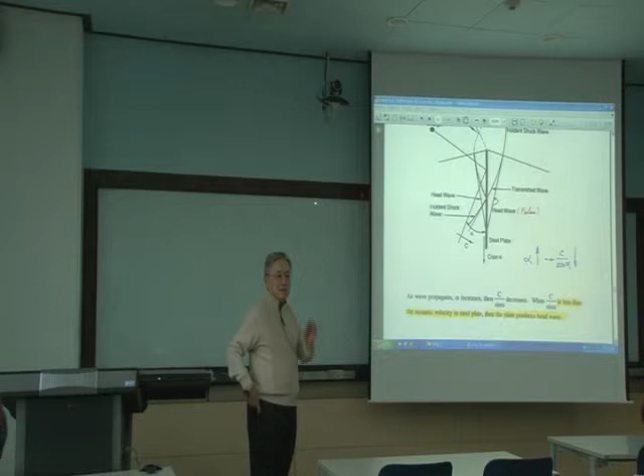Okay, for about 5 or 6 weeks on the underwater explosion topic, the amount of time is not enough, but I expect you capture the essence of underwater explosion. That's what I expect. So even if I cover the first few chapters, the remaining chapter is beyond underwater explosion.

It's combined with the structural dynamics area. So as you capture about 5 to 6 weeks, that amount should be sufficient for the time being, okay? So you have fire a little bit, you have gas explosion a little bit, you have underwater explosion a little bit.

As I look at Abdullah's November project on gas explosion, it's very interesting, a small report he prepared with Hyunchul. Looks very good. In that case, he talks about the combined effect, explosion, gas explosions, and fires, and all that.

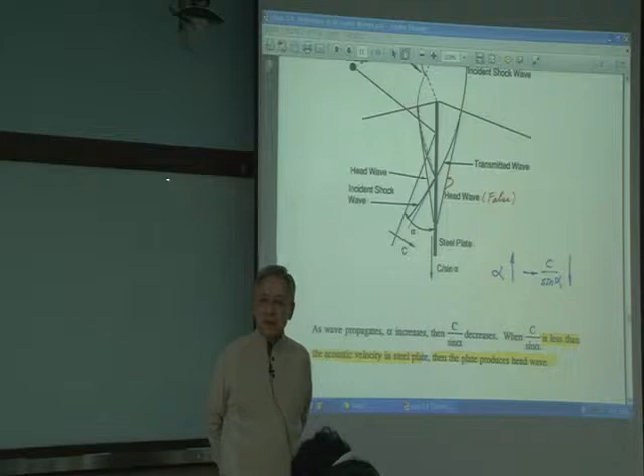This part is remaining of section 2.4. I didn't cover it, but I'll talk a little bit, then I'll move on. So as I mentioned, 3 parts this semester: we cover fire, gas explosion, underwater explosion. All the characteristics are quite different, but I'm pretty sure you gain some insight into the phenomena, but they are not really, if you look carefully, independent of each other.

It's all connected. It's really in the art of explosion. Fire is always there, so gas explosion can be connected very easily, and underwater explosion can be connected with fires and so on, okay?

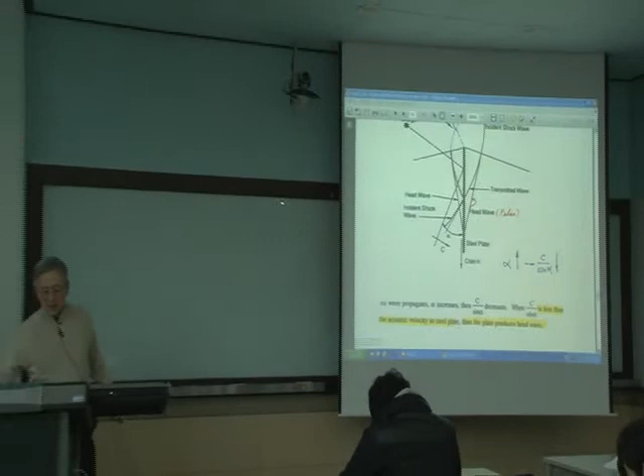This wave is really interesting, and it shows the general. This was one of the Navy reports, but it's not a classified report, so it's showing the general wave action. This is a foam, okay, like a styrofoam. And this is a steel plate, and this is styrofoam. This is a really interesting type of material that the wave cannot transmit through, okay?

It's something like air also. And of course, think of this media as water, and this is a foam. So which means in the water, there are air pockets in there. Whenever you have an air pocket, the shock wave does not able to penetrate through the foams, okay?

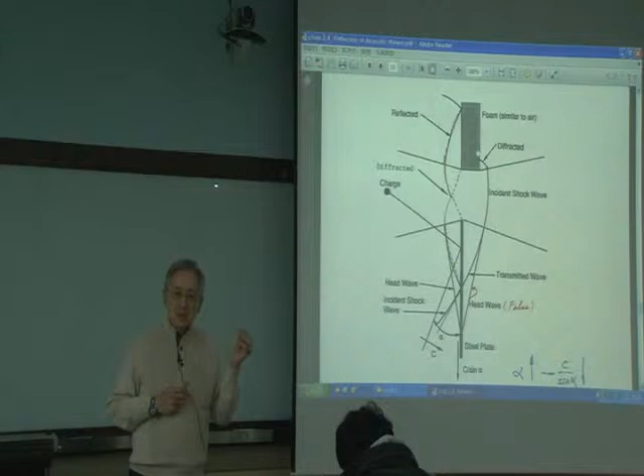Because we learned this week the water and air interface problem, shock wave in the water does not transmit into the air. Very little. As we saw in the example problem, only a fraction, 1 megapascal out of 1,000 megapascal, passes through. But we don't even recognize it, we don't feel it.

So here this is a foam, but as steel is concerned, it transmits the wave right through. It's almost transparent, okay? So the charge explodes right here, and this is the opening, okay? And this is just drawn in 2D. You can think of it as 3D also.

So at the time of explosion, of course, a shock wave will propagate. So this portion is the wave passing through the hole here. So this portion is the incident shock wave. Then it's going to propagate through.

But this is a continuation of this incident shock wave, closing in the backside of the foam. This wave doesn't go through here. It does not go through the foam. And this is called the diffraction wave.

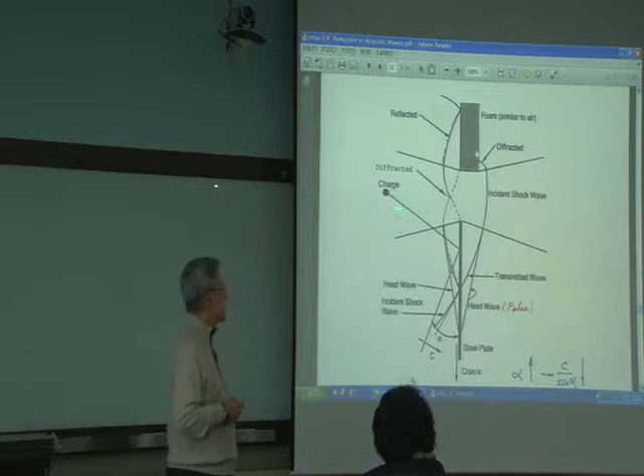What the diffraction wave is - if you turn on a flashlight in darkness, for example, you see the light go through. Behind the obstacle, in this case a foam, if you stand here, you still see the light there. You can see things because of the diffraction effect. Diffraction wraps around. Okay, that's a part of the wave.

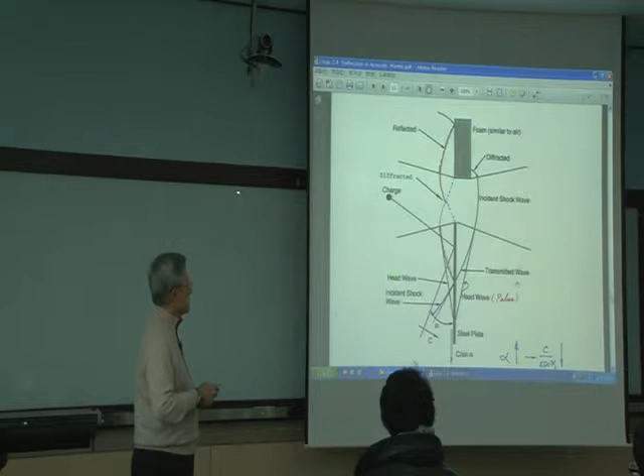And of course here the wave reflects, as at the time of explosion, the spherical wave will generate and propagate. It hits, then it will reflect, because this acts as air, and this is the reflection wave.

And the reflection wave here, see, it wraps around the corner here. So this part is called the diffraction, same as here, okay? And on the other side, at the corner, it diffracted right from here, going through, it closes. Wave never jumps. It's always close to each other.

And this side looks a little bit complicated, but the reason I put this in is to show you the so-called head wave. Whenever you hear of the head wave, there is no energy in the head wave.

Very little energy, almost no energy when you hear the head wave in the water. Look at this closely. As the spherical wave hits the steel, it penetrates through. This portion is the transmitted wave, with continuity preserved here. And as the shock wave moves forward, the reflection wave from the steel plate occurs.

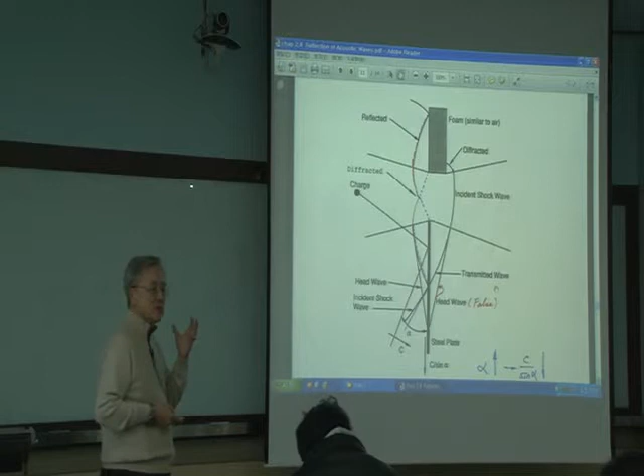Then the end of the wave is suddenly moving faster. It zaps and goes through faster. So it gives an effect to pull the wave here, this reflection wave and transmitting wave right at this corner, and it moves fast along the plate. So it generates suddenly another wave in front of the reflection wave and transmitting wave, moving this way and that way.

Not much energy, almost no energy in there, this head wave. This effect is something like when submariners are inside of the submarine and an explosion occurs someplace. They can hear the explosion, then suddenly they feel the wave hit by the head wave. But in fact, that was not really the energized wave, it's just a false wave. Sometimes this is called the false wave, not the realistic wave. Then they feel, oh, something has happened, so they feel it's gone.

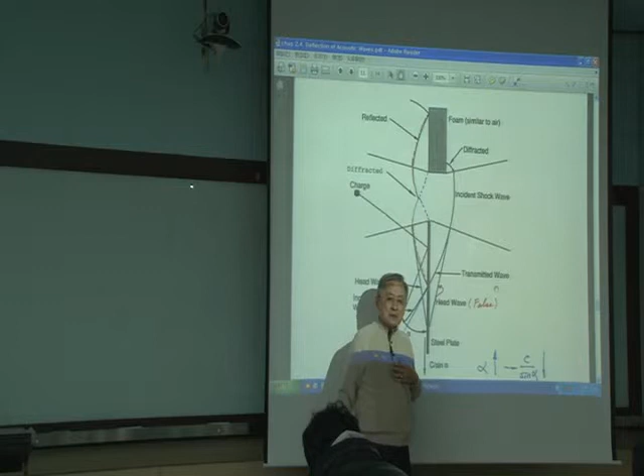In the very next moment, the rear shock comes and hits. But physically the head wave does not affect the target. So this is the reason I put this on. And this case is similar, but this is a plate all the way, showing how the head wave is generated at the end.

This is the case similar for the effect on, affected by head wave, water, and this is the charge, and this is the incident shock wave by the charge, and the image charge - I could put it here - this is the image charge, reflection by the charge, which means you can put the image charge and draw the shock wave front. This is a wave front by the image charge, so it's a reflection wave.

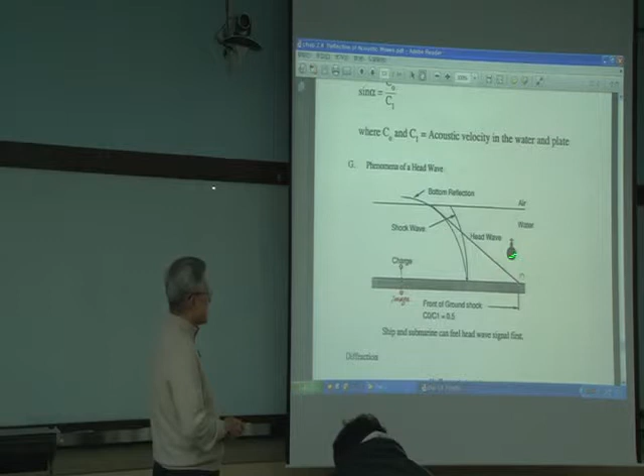Then I can draw this point pulled along here because the acoustic wave in the ground is much faster than C naught over C1. C1 is the acoustic speed here in the seabed, and C naught is the acoustic speed of the water, and this point gets the effect to pull. This point will move, but it looks like there is another wave in front of this bottom reflection wave. Another wave will generate and propagate, and this so-called head wave will hit the target, but they feel, oh, something came in, then the rear shock comes afterward. So it's called the head wave or false wave.

But in any other book, they don't talk about the head wave. I think only for naval applications do they talk about the head wave here. And the diffraction wave creates a shadow zone behind the obstacle.

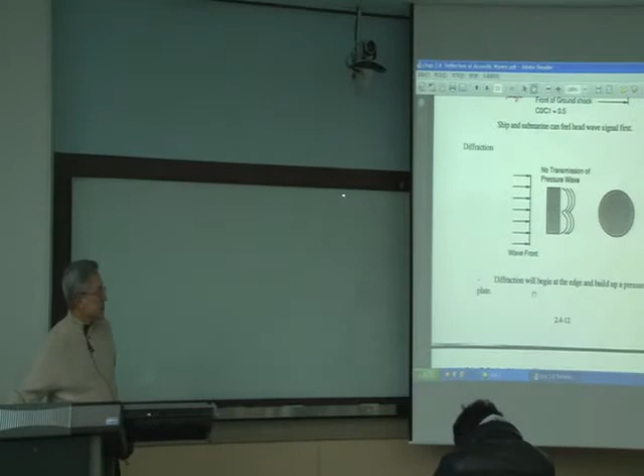Read it through, this is the last equation in chapter 2. The wave propagation velocity in the water - this is acoustic speed in the water - is a function of salinity.

Salinity is the salt content, measured in parts per thousand. The range of salinity S is about 34 to 37, so the value is almost fixed. If you go to the Indian Ocean, Atlantic Ocean, or Pacific Ocean, this value changes a little bit, but you can say 35 or 36, that's really fine.

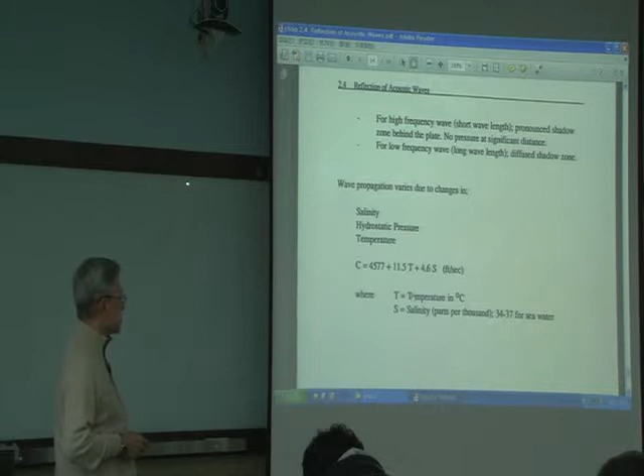Acoustic speed in the water is also a function of hydrostatic pressure. As you go deeper and deeper, acoustic speed changes, and temperature is another parameter. But hydrostatic pressure is a secondary parameter, not the major player, so you can neglect that.

Then C equals 4577 plus 11.5 T plus 4.6 S. This is unit dependent - C is in feet per second, temperature is in Celsius scale, and S is just a unit number between 34 and 37.

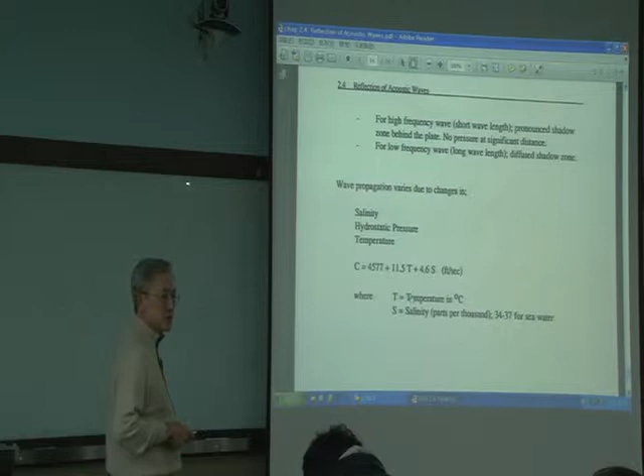So if you have to consider more accurate acoustic speed in the water, this is the equation you can use. This is not for acoustic wave propagation study - the focal point for this equation is really for explosion relevant cases. When you talk about underwater explosion with a surface ship or submarine, this is a perfect equation.

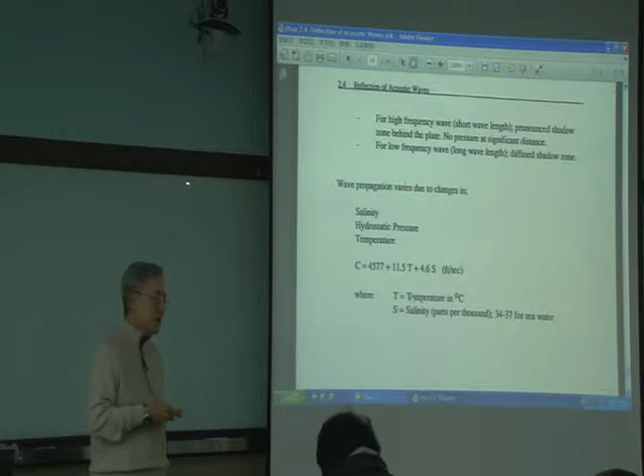But if you talk about acoustic velocity, caustic effect and all that, then you have to consider the effect of hydrostatic pressure, because it depends on depth - like 20,000 feet, that's deep water. That situation affects the acoustic speed, so you have to account for it. But in underwater explosion research, this equation is a very good equation - you can use it without any reservations.

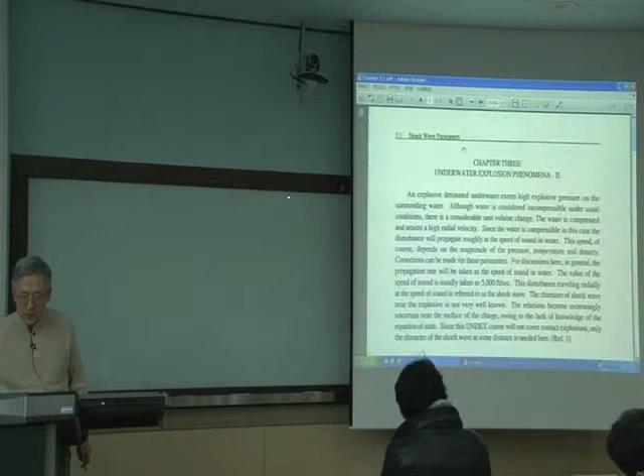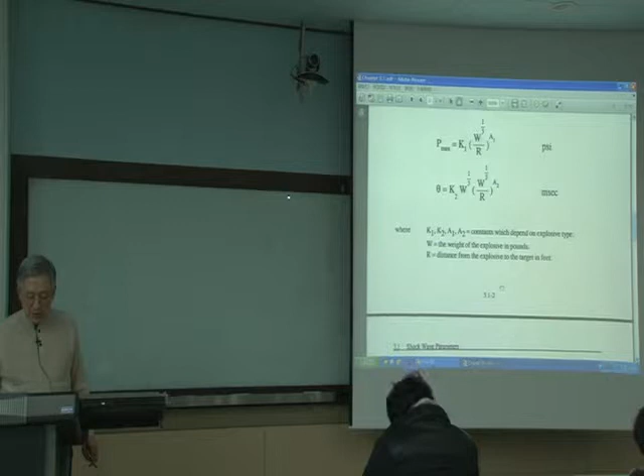This note is not the original - you modify it, because as I showed yesterday, a red line happened to be there. Anyway, P max and theta - what do you call theta? Decay constant, right? Which really defines the decay rate of the exponential decay pressure profile. And this is what we did yesterday.

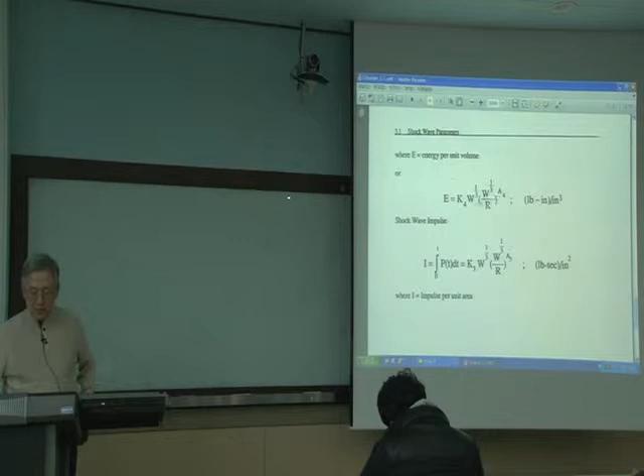This is a collection of all the empirical equations. Also here, this is energy per unit volume, this is impulse - shock wave impulse. And A4, K4, A3, K3 were in the table as I showed yesterday.

And section 3.2 I started yesterday - gas bubble behavior and gas bubble pulse loading.

Here, what's A max? Bongshik, what's A max? Yongyan, what's A max? Louder. Maximum bubble radius - the first gas bubble, that's the largest, right? A max. What's the 33?

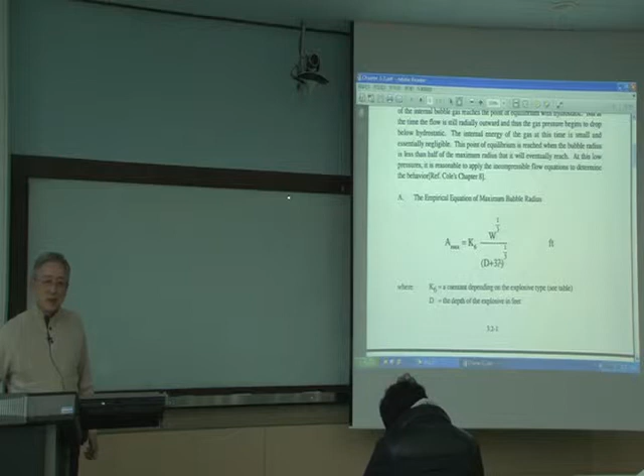Abdullah, what's the 33? How do you derive the 33? Kyungsuk, where does the 33 come from?

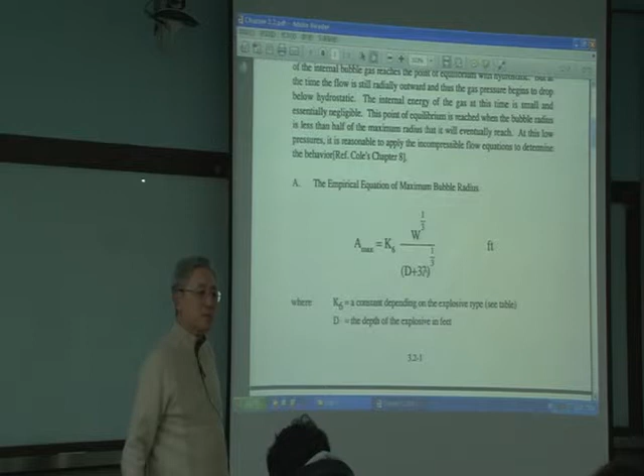Atmospheric pressure, equivalent hydrostatic depth for atmospheric pressure, 14.7 psi or 1 bar. We did this, right? Remember? And what's the T here?

Jude, what's the T here? This is the first period of the gas bubble.

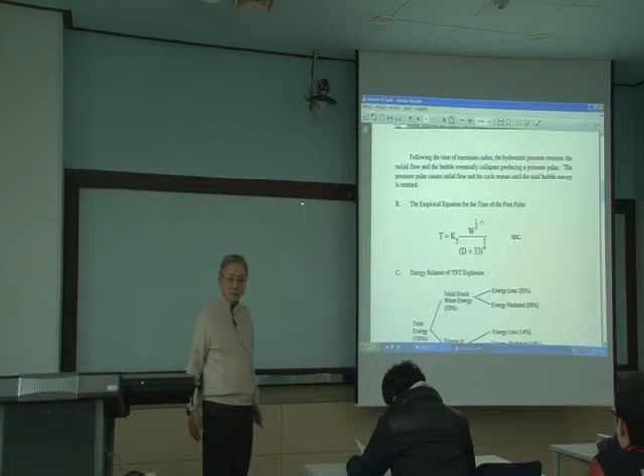Sometimes you have to compute the gas bubble radius. And I mentioned to you on Monday, total energy - about 53% of the energy is taken by the shock wave. The remaining 47% comes with the gas bubble. Gas bubble is much slower.

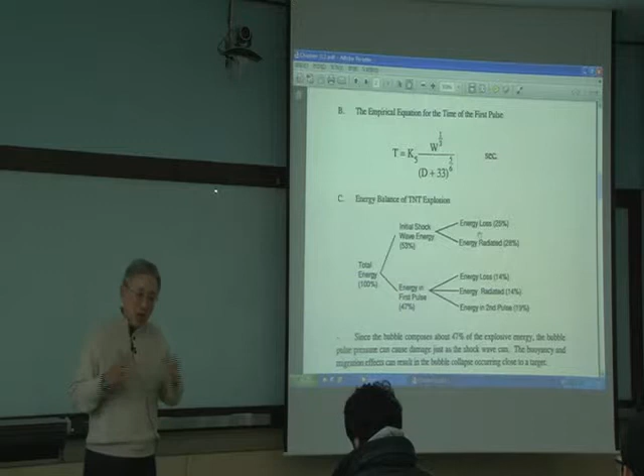Shock wave hits and goes away, but gas bubble oscillation is slow. That really gives damage to the target, damage to the ship, damage to the submarine. And 47% - shock doesn't carry everything, only about 53%. This is really experimental observation.

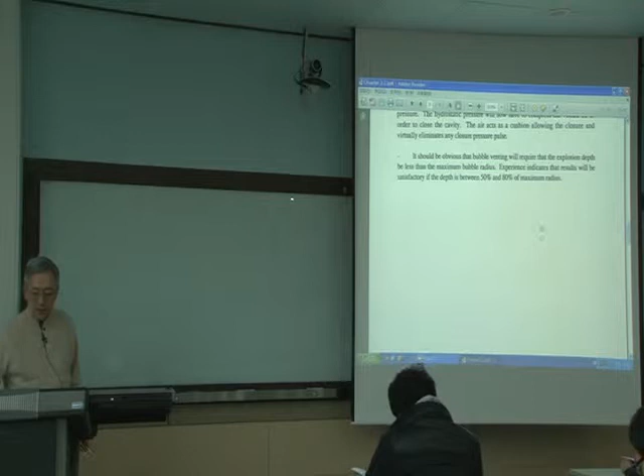And this varies, so I mentioned you don't have to worry too much about this, but it is important: 53% roughly sweeps away with the shock wave, the other 47% comes with the gas bubble. All this phrase is a reminder, and when you have time, I really want you to read that.

Today, bulk cavitation is what I want to talk about - next about 20 minutes, bulk cavitation. When you hear about bulk cavitation, cavitation at the time of explosion always occurs near the surface, near the free surface.

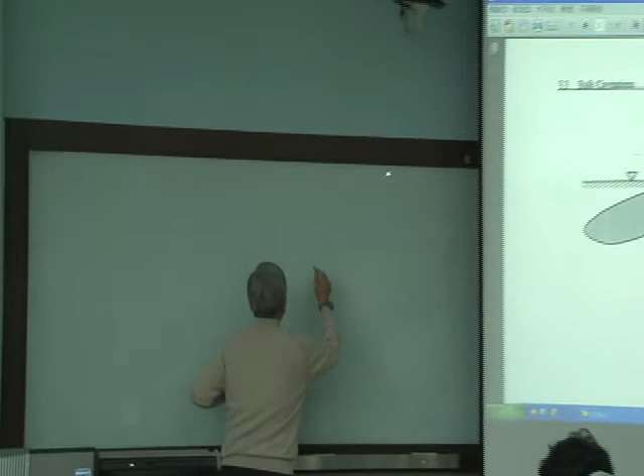This is a free surface. So I'm going to put the vertical line here. So I say this charge is sitting right here. And as you see, the shock wave really propagates in all directions, in radial direction. When the shock wave hits, then this bulk cavitation zone occurs near the free surface, like an umbrella shape.

This is the upper cavitation boundary. Upper - this is the upper cavitation boundary.

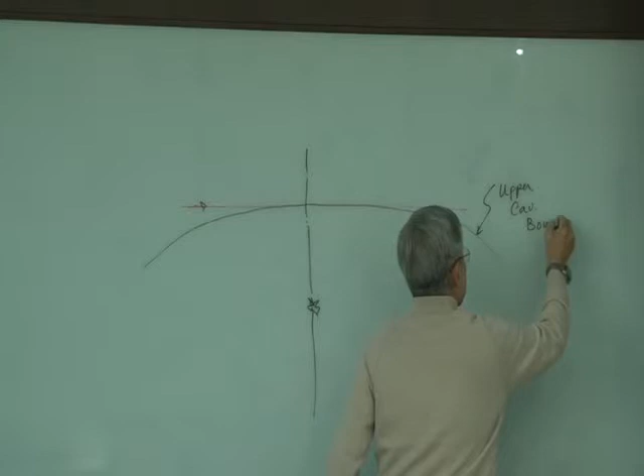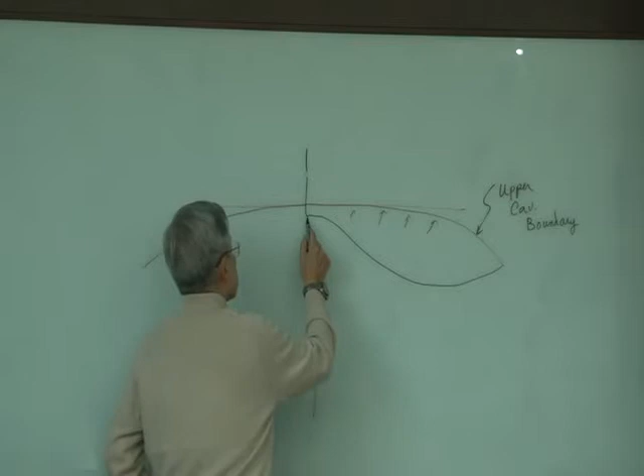This is due mostly to the incident shock wave initially, but afterward, due to the rarefaction wave or tension wave, a lower cavitation boundary occurs, something like this. It's not very good, but it's of course axially symmetric, it's 3D, you can rotate this. It's like a big umbrella kind, not that really fat. The calculational result also shows in the next few pages.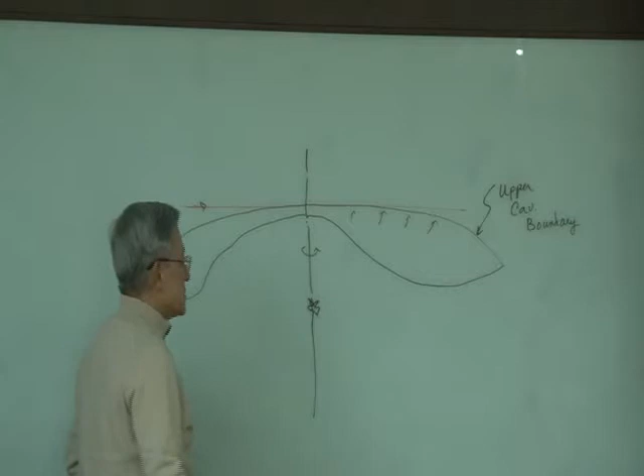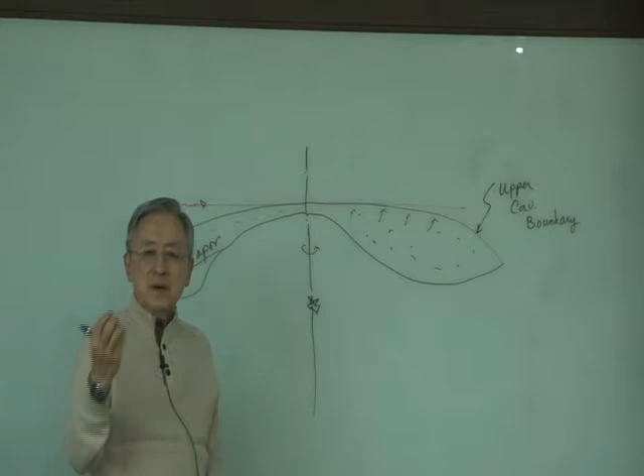When you hear about cavitation, you can think of a bubble, like propeller cavitation with lots of little bubbles. But here, this is not propeller cavitation, this is really cavitation due to explosion in the water. All of this is like a vapor, a pocket with very misty water bubbles. There's no pressure inside here; pressure is equal to zero inside this bulk cavitation.

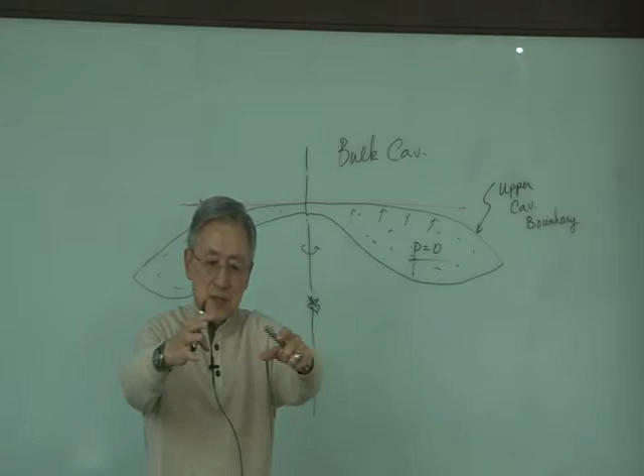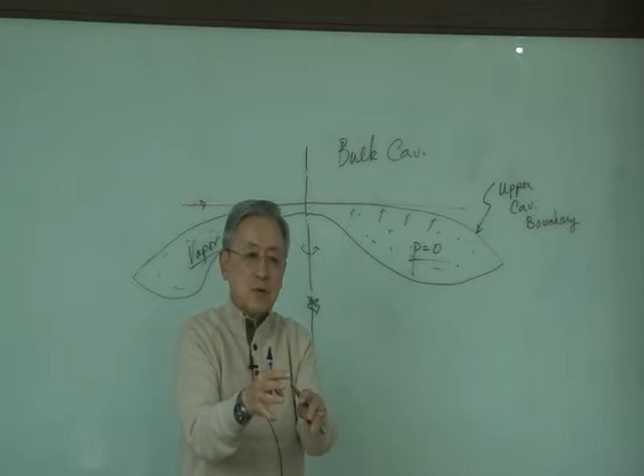At the time of explosion, if you have a chance to look down at the underwater explosion process, you can see the surface of the water suddenly turns white, and the white zone spreads fast. Then a plume occurs, but it doesn't stay long since it spreads quickly then closes. The cavitation zone closes because water is surrounding the cavitation air pocket, so it closes very quickly. It's a huge, umbrella-shaped cavitation zone, then it closes.

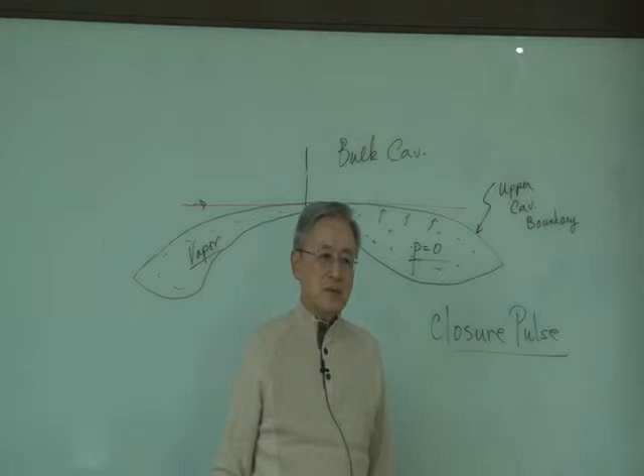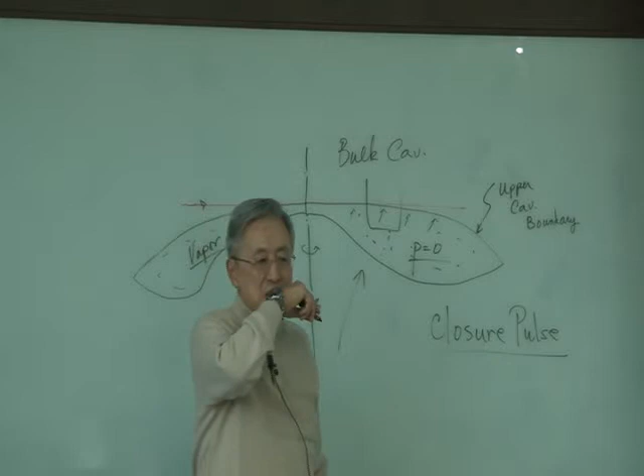In the water, in the explosion process, whenever it closes, it has a so-called closure pulse. It's a secondary shock wave effect. Bang, and it closes. So when a surface ship is sitting here and another shock wave comes, that shock wave cannot penetrate through this bulk cavitation zone, in the instant sense. So it doesn't affect the ship sitting on the bulk cavitation, but the phenomenon is so quick, not in terms of milliseconds, but you can explain it in terms of a fraction of a second. This is called bulk cavitation.

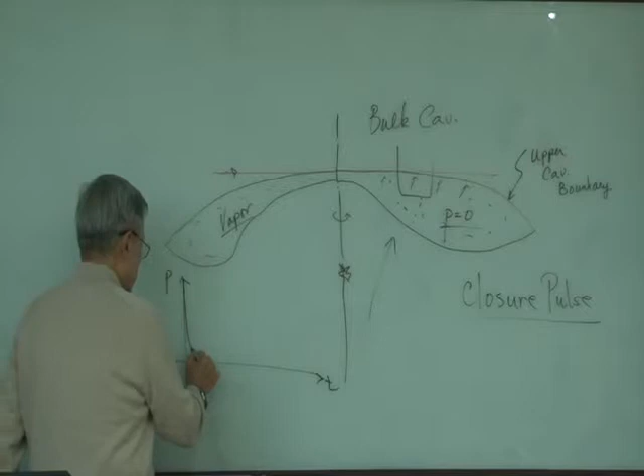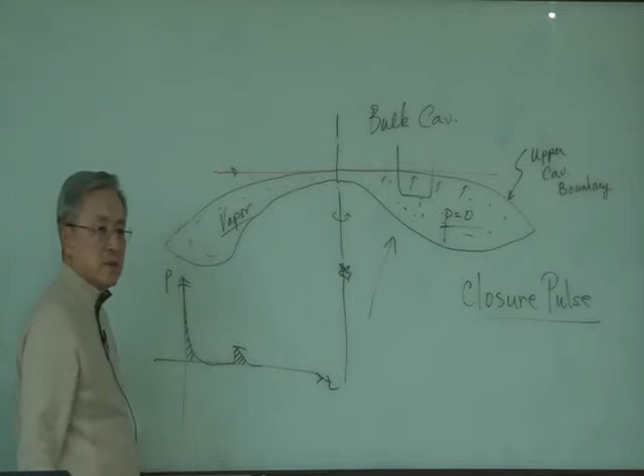But this secondary pulse is not that big. The incident shock wave goes straight up like this, and when this bulk cavitation closes, it could generate another peak. Pulse means another peak, but this pressure height is not big compared with the incident wave. But if you look at the area under the curve, you may not be able to neglect it, because the area under is called impulse. This impulse is related with damage, because it could give heavy damage to the target, so you have to think about that.

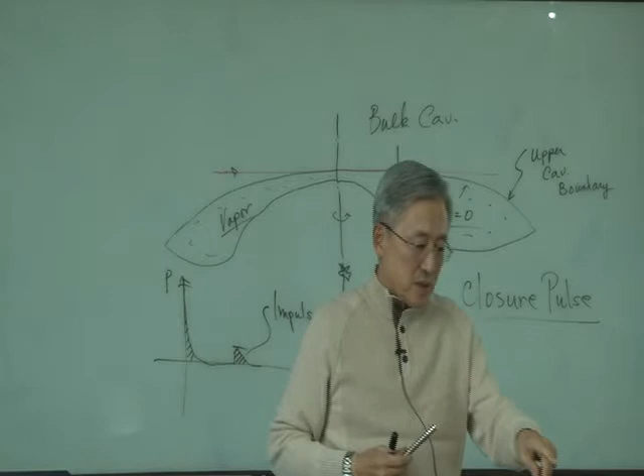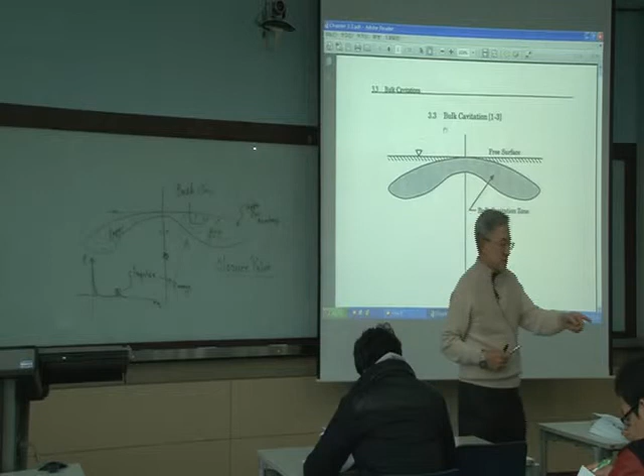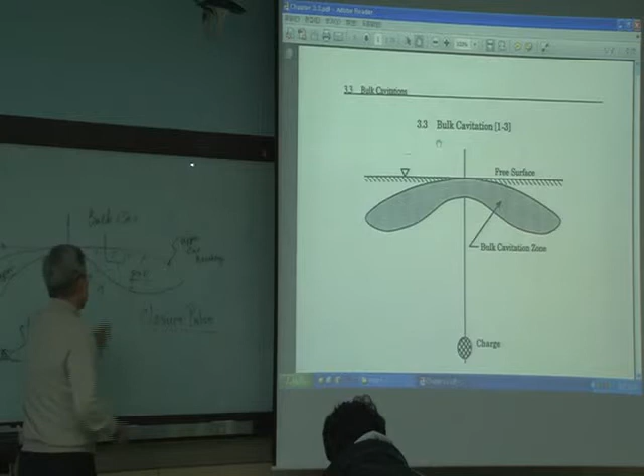So my lecture note has two different sections. Remember bulk cavitation, this is the section I'm calling section 1, to explain bulk cavitation. There's another section behind or in front of it to really derive the equation for upper cavitation boundary and lower cavitation boundary, front or behind of the section. This section is 3.3, we'll look around there. What's the section here? This is the section. So the whole derivation of the bulk cavitation equation is right after 3.3. Then you can really look at it, as you have time or want to know more detail, the derivation of upper cavitation and lower cavitation boundary.

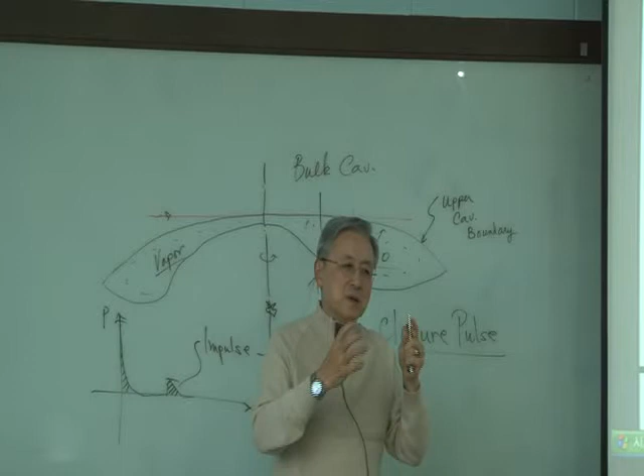When I say this vaporized water particle is really trapped in this bulk cavitation zone, I mean vapor, water vapor. The water vapor can resist tension up to around 0.3 psi, which is very small. So rather than dealing with that 0.3 psi, you can look at it this way.

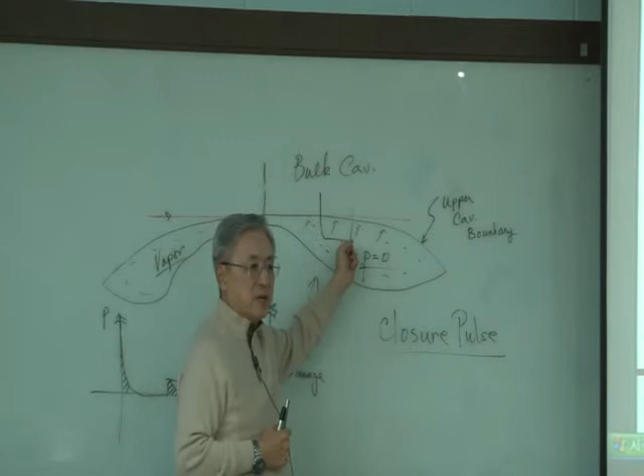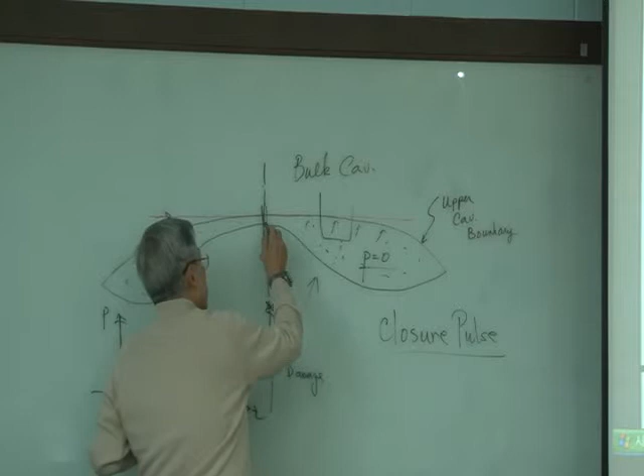You pick up any point. If at that point you can compute the total pressure, and the total pressure you computed is zero or below zero, then you can declare this is a cavitation zone, because water cannot sustain tension. Well, it could go a few psi below zero, but you don't have to worry about that. If the total pressure goes below zero, then you declare that cavitation occurs. Then you can draw the upper cavitation boundary and lower cavitation boundary. So you end up just computing that part, then it's axisymmetric, so you don't have to compute this other part.

When you rotate it, it's going to show the cavitation. So this I want you to read, I just put a few words in there. And the logic behind it is what this graph shows.

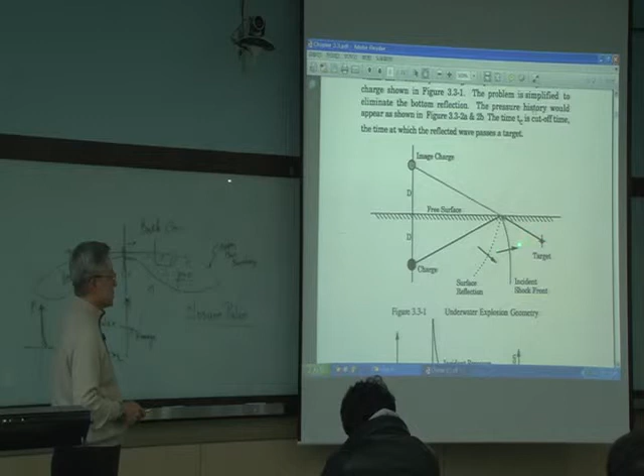This is the real charge, and this is the image charge. I draw the line here, then you can determine this intersection point. The incident shock wave is this line here, and this dotted line is the surface reflection wave. In other words, you put the image charge here, then draw the radius from here to here, and draw the line. So this is the surface reflection wave front. This will propagate, this will propagate, that's the basic wave action.

And of course, this is a compression wave, and this is a tensile wave. Think of the image charge as the attracting source, attracting the water particle here. Then the wave front is moving downward, and all the water particles, due to the image charge, are shooting toward the center here.

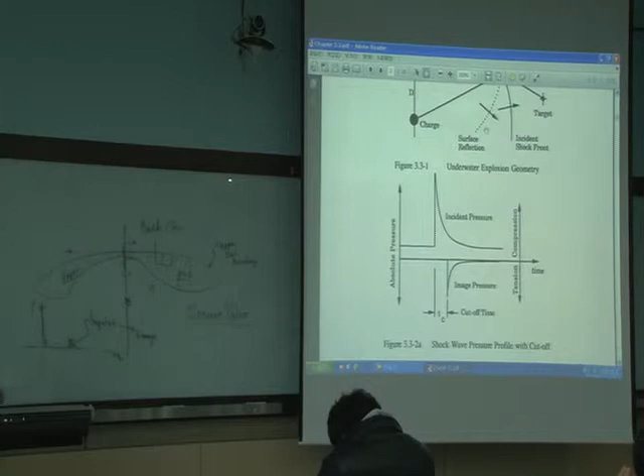Drawing into the XY plot, this is the whole story to explain the bulk cavitation. Inside the bulk cavitation, total pressure is equal to zero or below zero. Water cannot sustain the tension, so below zero means it's zero. Here, the vertical axis is absolute pressure.

Hyuncho, look at here. I can't afford to lose anybody here. This is absolute pressure. And this part is what pressure?

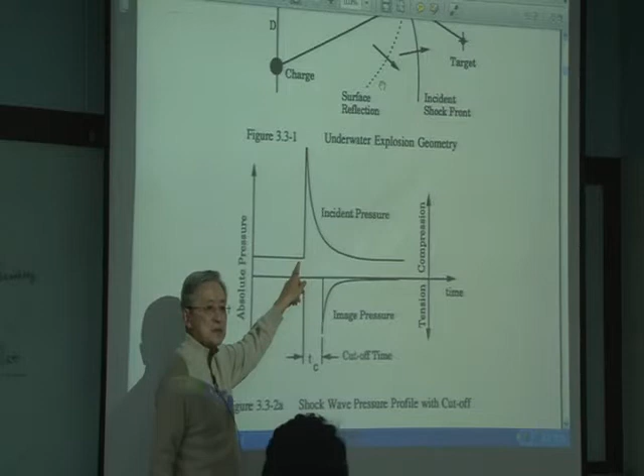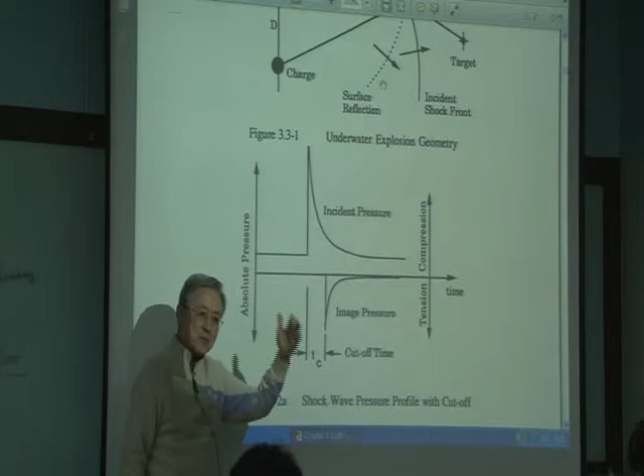You could have a target someplace below zero here. Then this part is hydrostatic pressure plus atmospheric pressure, right? So this part always there is static pressure. When you look at the target point, which is below the free surface, it's hydrostatic pressure up to that depth plus atmospheric pressure, always there, 1 bar, 14.7 psi. So it's there, right?

Then bang, then explosion occurs here. It's right up there, then it's shooting up. So from here to here is what? Dynamic pressure, right? Due to the shock wave. Due to the shock wave, it's a bang, and after that is an exponential decay curve, right?

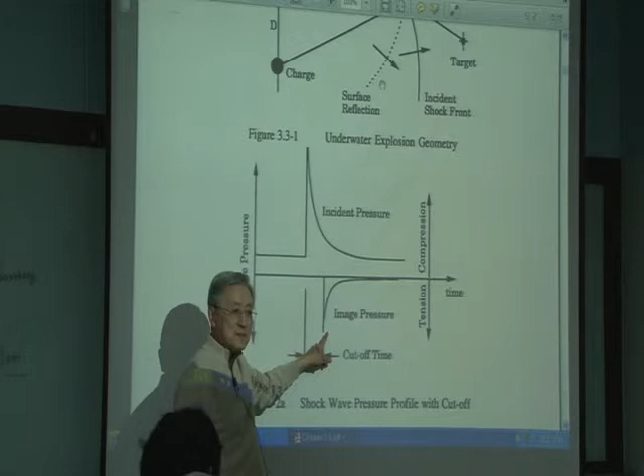Make sense? Then suddenly there is a negative pressure peak coming down and slowly merging into zero. What's this? Juil, what's this? Kolgi, what's this? Tell me.

That part is the surface reflection wave, or tension wave. Surface reflection wave, look at this. It's the first wave reflected from the surface to hit the target. So as you look at it, this is the reflection wave path, straight up and coming down here, right?

So this is pressure. I put the gauge right here. This is the pressure profile. And the incident shock wave, by this straight line, hit the target first, right?

Before the target is hit, it's static pressure. When the shock wave hits the target, shock pressure is added right there. Then the shock wave passes through exponential decay and converges to just the nominal pressure, right?

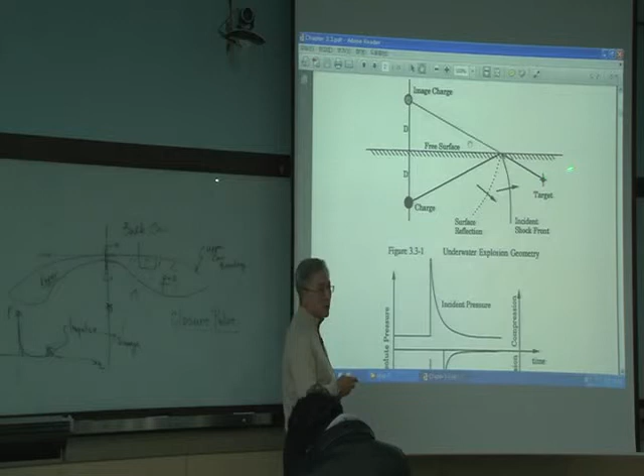But the surface reflection wave comes up along here. Then, due to the reflection, it takes this path and hits the target, compressive wave here. Then from here to here is called the tension wave, or as I talked about before, tension wave or rarefaction wave.

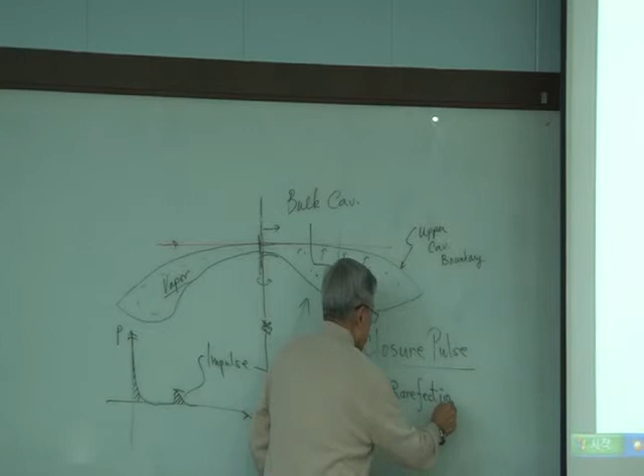Or the surface reflection wave, it's all the same. Up to here is a compression wave. From here to here is a tension wave. Tension wave is the wave which pulls the water particle. Water cannot sustain the tension, which means it comes right down to zero.

So look at this, water from here to here, water particles try to fly along this line toward the image charge, and the water particles keep trying to shoot as the wave comes down here. Toward the image charge, the water particle is moving in the image charge direction, but the tension wave front is moving toward the target. So the fluid particle along the tension wave line is moving toward the image charge, but the wave front is moving toward the target. It's opposite each other. It's called the tension wave, rarefaction wave, and so on.

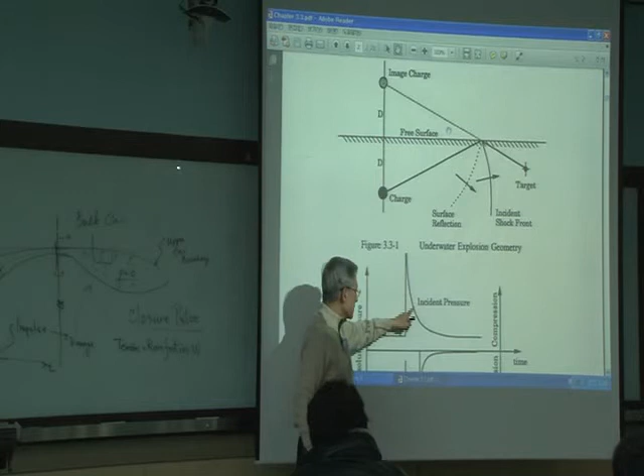That's the wave from this part. So after the incident shock wave hits the target, it exponentially decays. Suddenly, right at a certain point, the tensile wave comes and hits the target. So it bangs down to the P max for the rarefaction wave, then reduces down. That's what this portion is.

It keeps going up, it passes through, eventually just goes away, gets down to zero. There is no static pressure. This is dynamic pressure, which means tension, tensile pressure, okay?

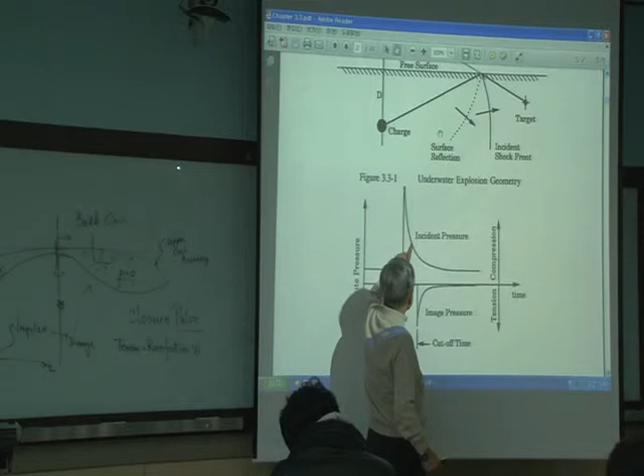Then, right at the point, if you add it all together, this is going, start here, bang, no change, bang down, then right at this point here, how far after? At Tc time, this is called the surface cutoff time, a very important phenomenon, okay?

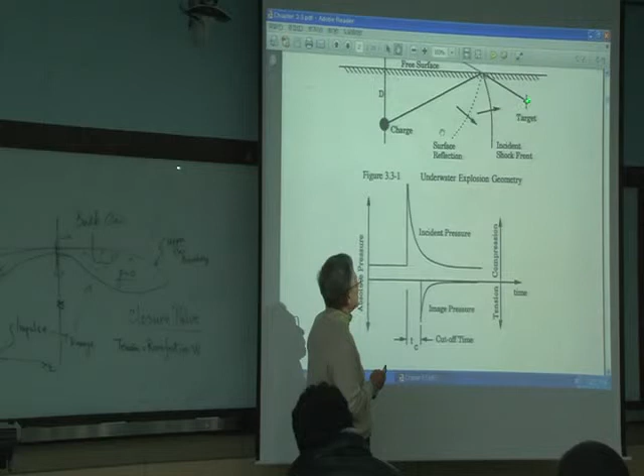Surface cutoff time, this is the difference. The cutoff time is the time difference between the incident shock wave and the reflection shock wave.

Which means if I say this will take more time, this incident shock wave will hit the target first. That's T1 right here. This distance is from the image charge to the target point. This distance plus that distance minus the distance from here to here.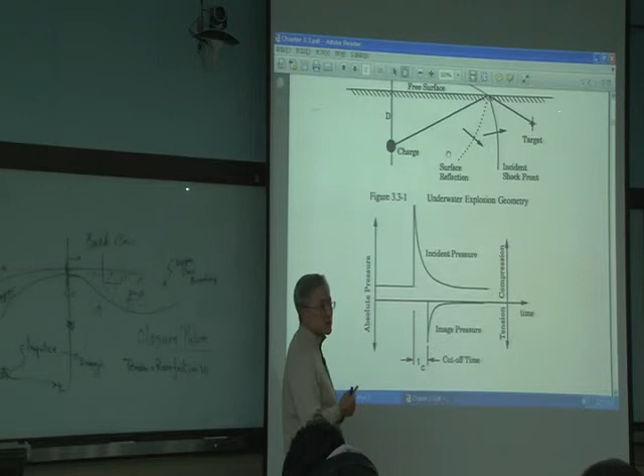So let's call this distance R2 and this distance R1. R2 minus R1 divided by acoustic velocity C is the time Tc, right after the incident shock wave hits, then Tc time later the tension wave coming hits the target.

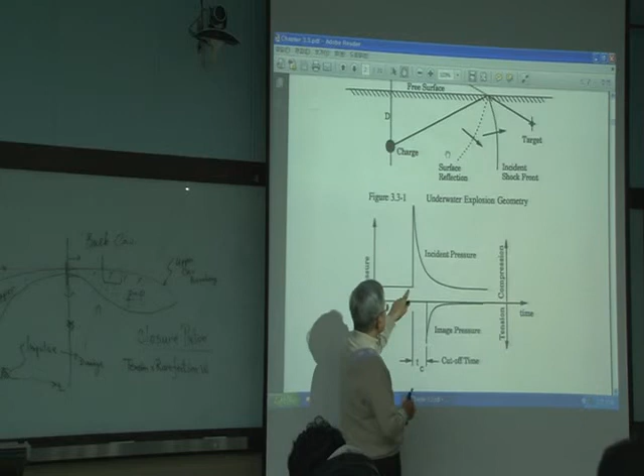So here it goes up and down, right at that point, bang, it comes down. If you add this pressure together, it could come below zero. If it's below zero, you have to reset to zero because water cannot sustain the tension. So it's going to go up and down, down. Then when the bubble, the cavitation, closes, then there is another hump. Eventually this will converge to the nominal pressure.

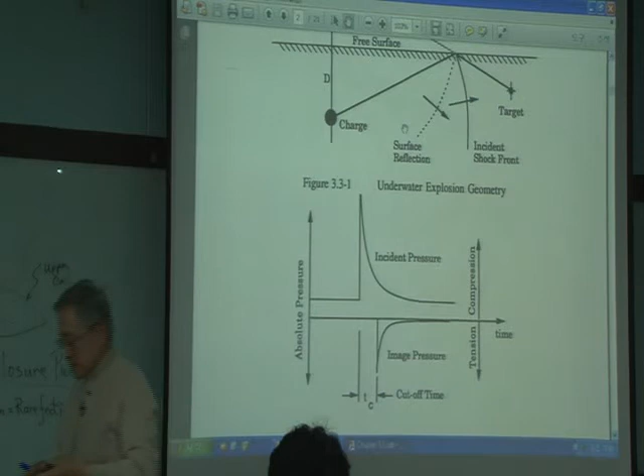It should be good enough. It comes a couple more times. So here, this portion, this cutoff, surface cutoff is right here, okay? Right there.

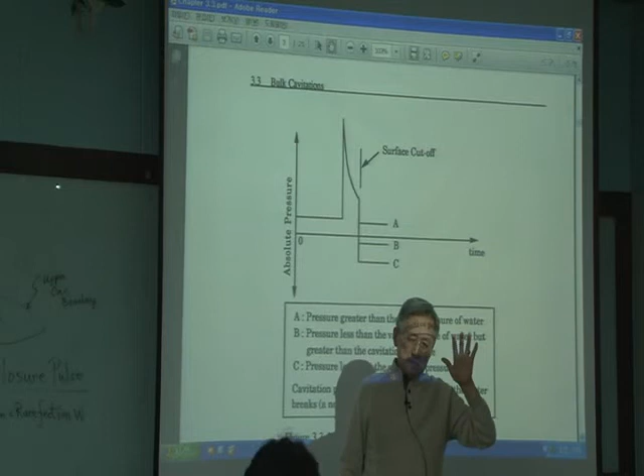Sometimes when you add two pressures together, it could come right here, or below zero, or way below zero. The chances depend on the depth of the target. For case A, pressure greater than the vapor pressure of water, and the cavitation pressure could be around here. Cavitation pressure means the pressure which breaks the water particle, really breaking it into the molecular level, around negative 3 or 4 psi, maybe could fall around here. Doesn't mean much, because we are dealing with a dynamic pressure which is much higher.

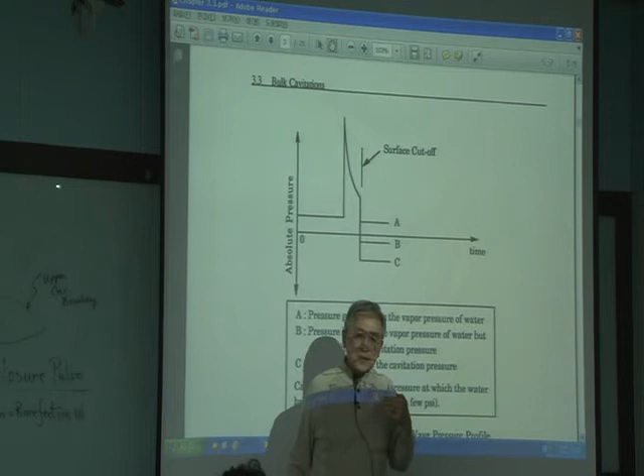Eventually we reset to zero to declare whether it's cavitated in the water or not. But in the strict physics sense, it could have here, could have here, could have here, but cavitation pressure could be somewhere along there, okay?

Point B is a pressure less than the vapor pressure of water, but greater than the cavitation pressure. If I say cavitation pressure is around there, and it's the pressure at which the water really breaks off, a negative few psi, it really doesn't affect. Remember, cavitation occurs if the total pressure is 0 or below 0. That's all you need. But I explained so much detail in there.

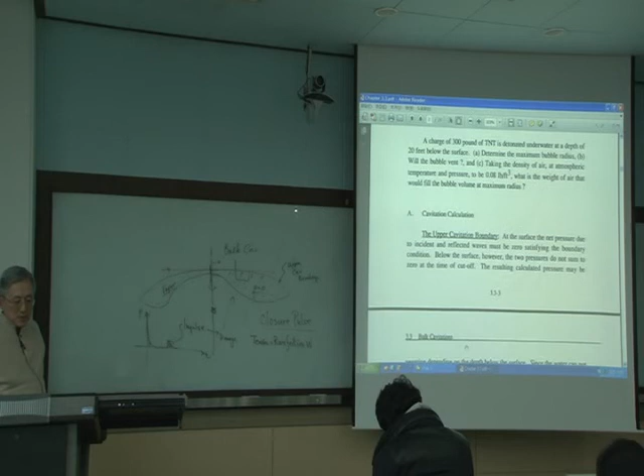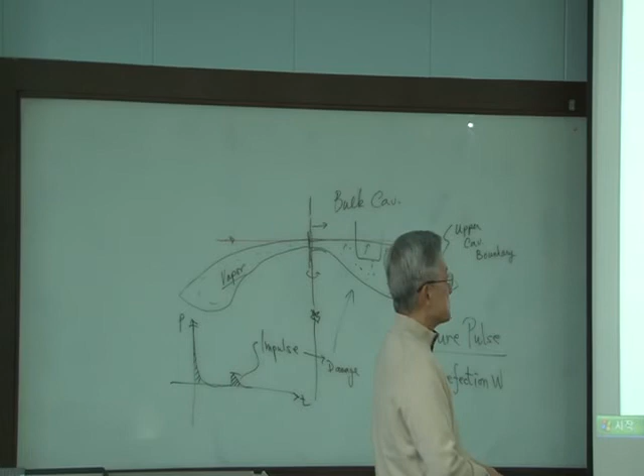And next one is a cavitation calculation, the upper cavitation boundary. For computational purposes, what you have to do is compute it. You can make a really refined grid, like an FEM grid, okay? Then you have to go through point by point using a do loop in your MATLAB code. You can set up the MATLAB code very easily. For this case, total pressure at any point you have to compute.

Check whether the pressure at that point is 0 or below 0. If it's not below 0, that point is not cavitated. But if it's below 0 or 0, then you put the point there, oh, this is cavitated, the point. So it has 4 different pressures.

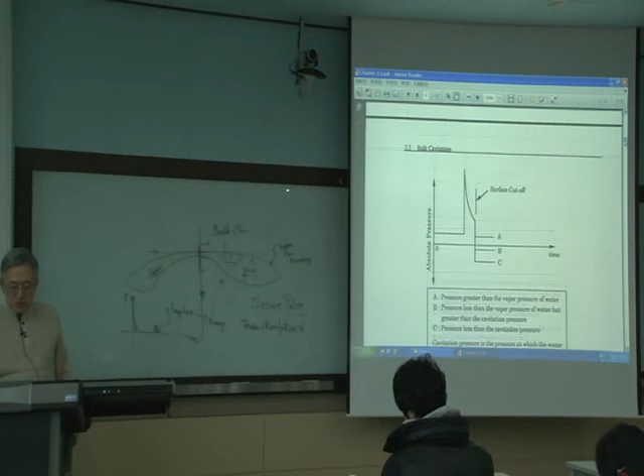One is the incident shock pressure at the time when the rarefaction wave arrives at the point to be considered. What that means is here is this. Move the point straight up, that point, at the time the rarefaction wave or tension wave hits the target, which means right at that point here. So you have to compute the incident shock wave pressure, not at P max, but at that point, okay.

Then that's what P1 is. P2 is the rarefaction wave pressure, which means right at that point, P max in rarefaction pressure. So what I'm doing here is summing up all the pressure right at the point called the cutoff time.

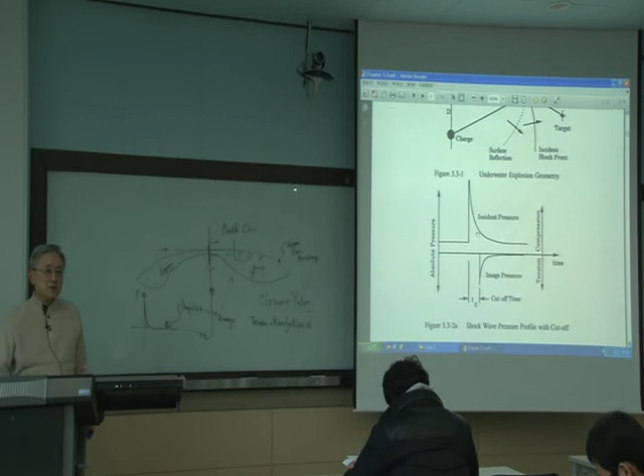If that pressure is below 0 or equal to 0, you can declare that point is cavitated. So PA is atmospheric pressure, PD is hydrostatic pressure for the depth. When you're summing up, if PT is equal to 0 or below 0, then you declare that point is cavitated. So you have to go through many points, making a grid with the do loop, then you can do that.

I'll stop here. The lower cavitation boundary is this, lower cavitation boundary here. Of course, along the lower cavitation boundary, total pressure is equal to 0. But for detecting this point, use a slightly different technique. That's what I'll show you Friday, okay.